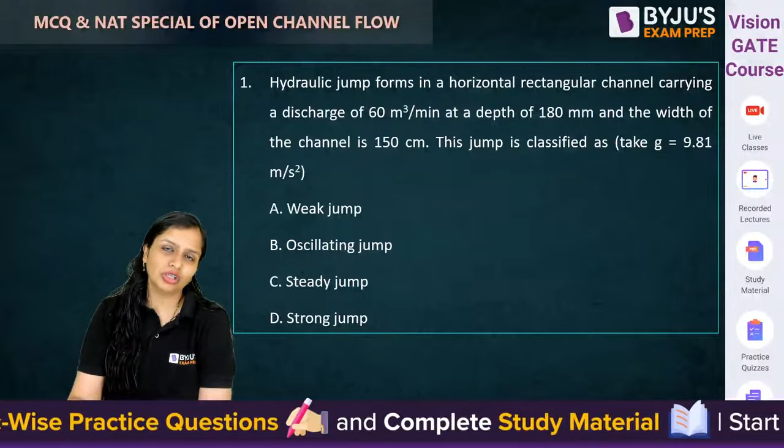Okay. So this is the first question, guys. Hydraulic jump forms in a horizontal rectangular channel carrying a discharge of 60 meter cube per minute at a depth of 180 mm and the width is 150 centimeter. You have to classify what type of jump is it. Come on, guys. I guess you already know, based on classification of Froude number, what is the type of jump. You need to remember it because it can be asked in match the following, it can be asked in numerical manner also.

So first you will calculate the Froude number. Since it is a rectangular channel, Froude number is V over root gy. Velocity I can write as discharge by area. Area is width into depth. Now, discharge is 60 meter cube per minute; convert minutes into seconds, 60 seconds. Width is 150 centimeter, that means 1.5 meter. Depth is 180 mm, that means 0.180 meter. Acceleration due to gravity is 9.81 and y is 0.180.

Solve it, how much is it coming? How much is it coming, guys? Solve it quickly. Calculate the Froude number. How much will it come? 2.787. Happy Engineers Day. Okay.

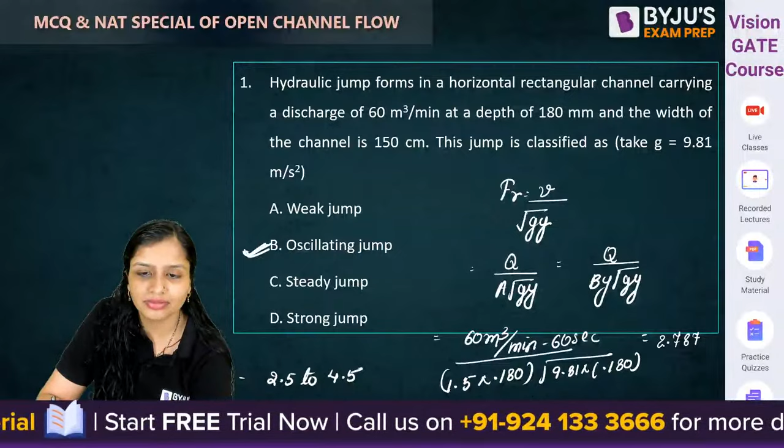So 2.787. You know, from 1 to 1.8 you call it an undular jump. From 1.8 to 2.5 you call it a weak jump. When the incoming Froude number is between 2.5 to 4.5, you call it an oscillating jump. So the type of jump is oscillating jump. Got that? Oscillating jump. Correct. Now, next question.

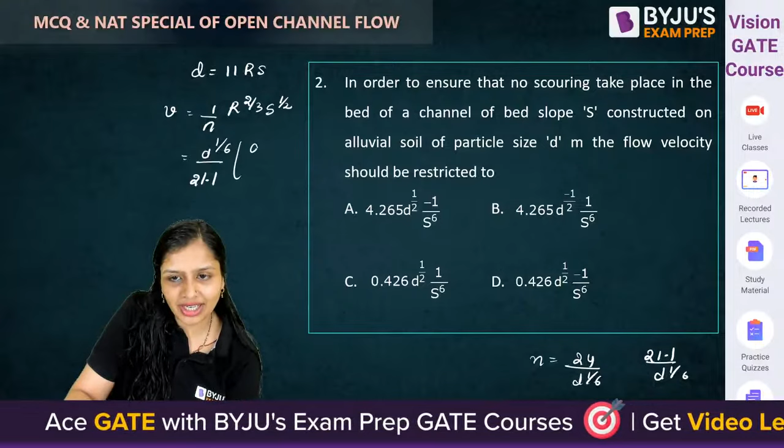For no scouring, d should be 11 RS. Velocity is 1 by n, R to the power 2 by 3, S to the power half. Generally, Strickler's equation gives 1 by n equal to 24 d to the power 1 by 6, but some books write it as 21.1 d to the power 1 by 6. Right now they have taken 21.1 d to the power 1 by 6. In place of R, you can write d by 11 S, to the power 2 by 3, and S to the power half. How much will it come?

How much will it come, guys? This will be in bottom only. Just a minute, 1 upon, or you can write it as 1 upon 21.1 d to the power 1 by 6. Anything is okay. How much will it come, guys? Tell me fast.

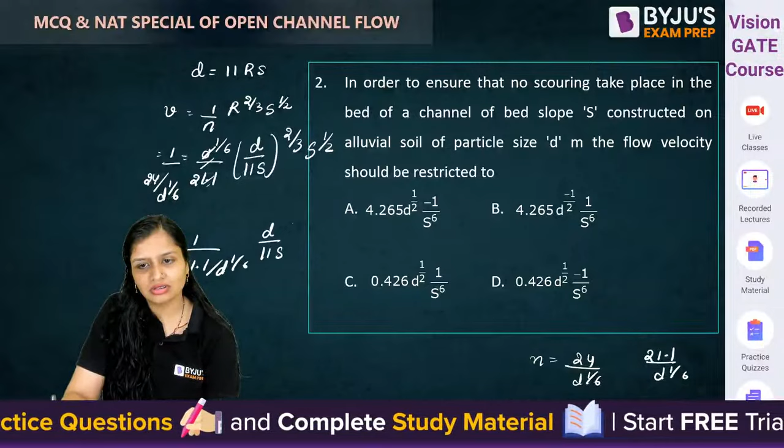S half minus 2 by 3 will come out to be how much? S minus 1 by 6.

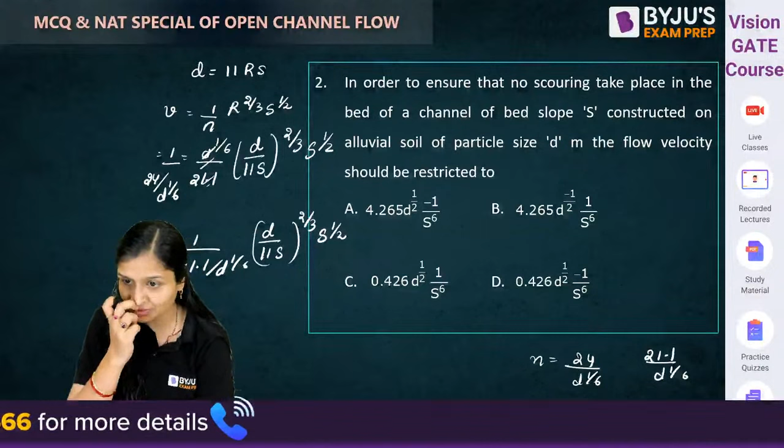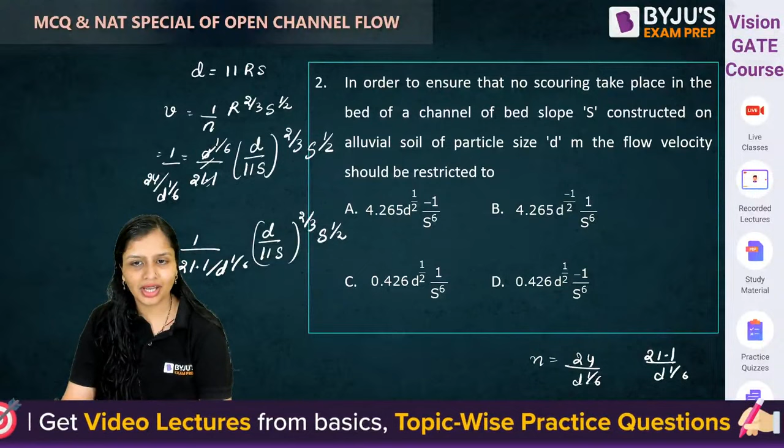Now you calculate, I have given you everything. I wrote everything. For no scouring, d is equal to 11 rs. The n value I have already given to you. It is from Strickler's equation 24 upon d to the power 1 by 6. You can also take this as 21.1 d to the power 1 by 6. Substitute it, you will get the answer.

Okay, this is a very easy question asked in many examinations. The Chezy's coefficient related to Darcy-Weisbach friction factor.

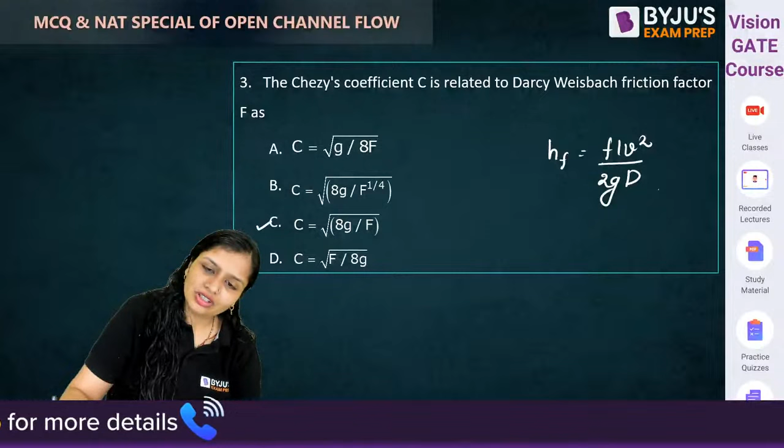Darcy-Weisbach friction factor is, you know this, FLV square upon 2GD. From here, if you calculate Chezy's constant coefficient, what does it come out to be? Correct, C is equal to root over 8G by F, where F is the friction factor.

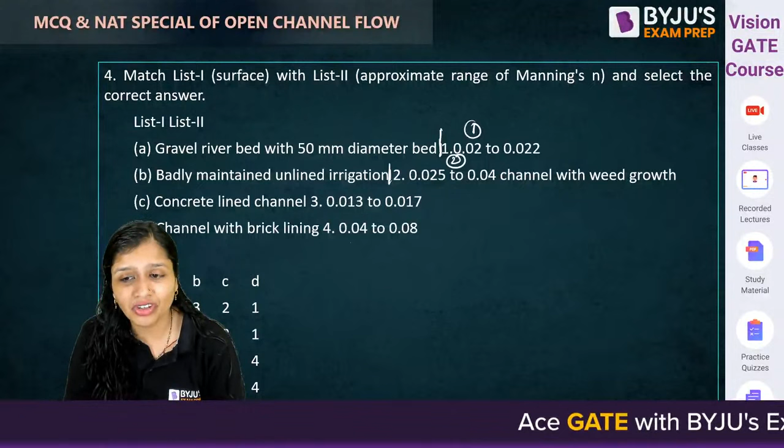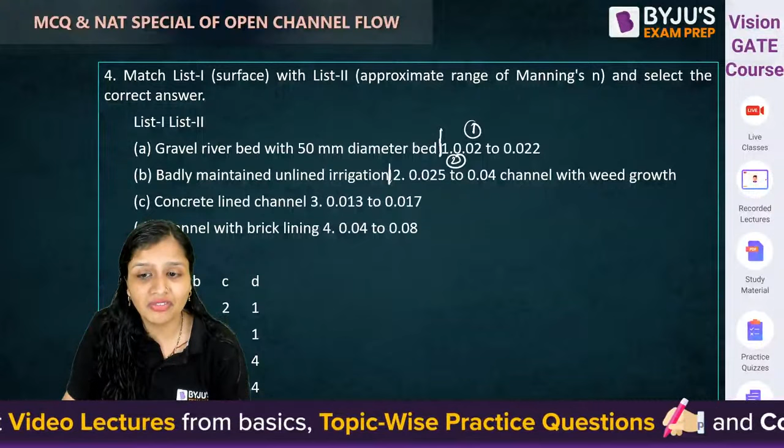If it is a badly maintained unlined irrigation canal, because you haven't provided any lining, no concrete lining, brick or masonry, nothing provided, so for that you will be having more Manning's coefficient. See, more roughness, more will be the Manning's roughness coefficient. You haven't maintained it, large friction will be there, roughness will be there. So definitely it will have the maximum amount of what? It will have roughness.

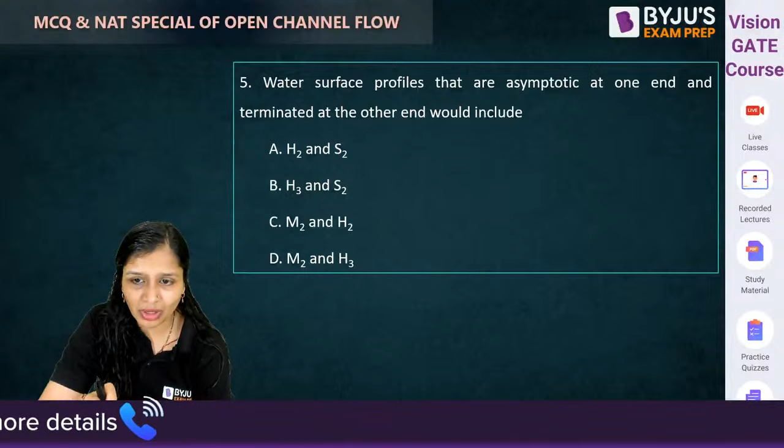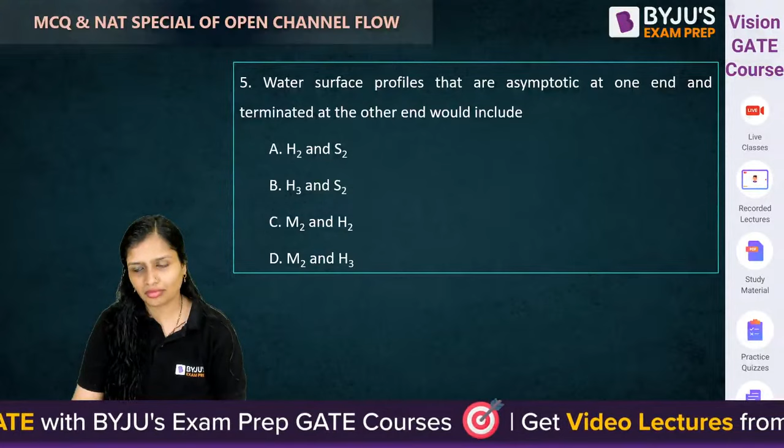Okay, now question number 5, now you will answer it properly. Water surface profiles that are asymptotic at one end and terminated at the other end. Asymptotic at one end and terminated at other end. Come on, guys.

Come on quickly, I want the answer for this question. At least you can give the answer for this question. If it is H2, what will happen? It will come, water will come from infinity.

Got it? Anybody got the answer? Nobody? That are asymptotic at one end.

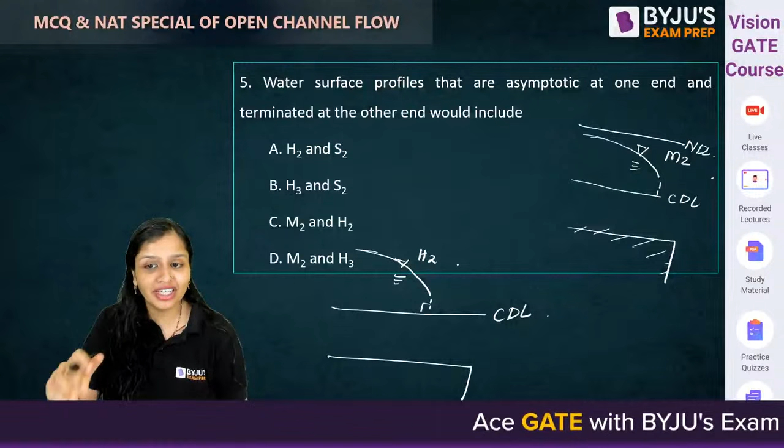Asymptotic at one end means that it will meet the NDL somewhere at infinity. Here you know that in horizontal slope you don't have H1, okay, and the NDL is somewhere at infinity first of all. So water will start from here and it will end at CDL. So what will happen? This flow profile is asymptotic at one end.

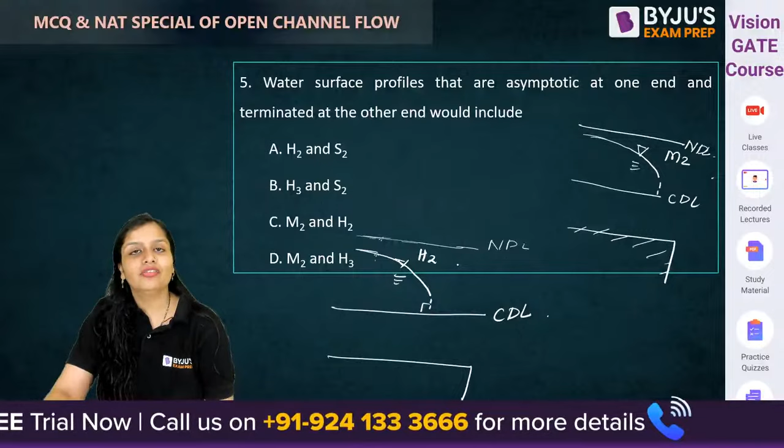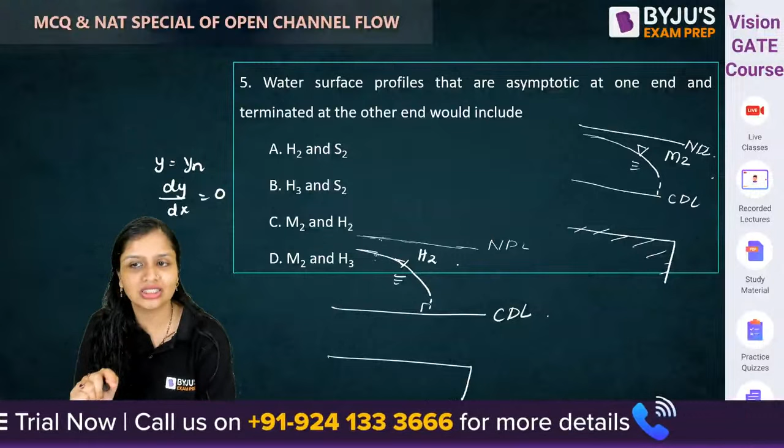Similarly, check it out. When y is equal to yn, dy by dx becomes 0, and when dy by dx becomes 0, it means that this water surface flow profile will meet NDL somewhere at infinity. So both H2 and M2 are asymptotic at one end. You can't say S2 is asymptotic because it is not, for that case, it is not going like this. It is not asymptotic at one end. Of course it will be a falling profile, but it is not asymptotic at one end. Got it? So that is the reason you won't call it S2.

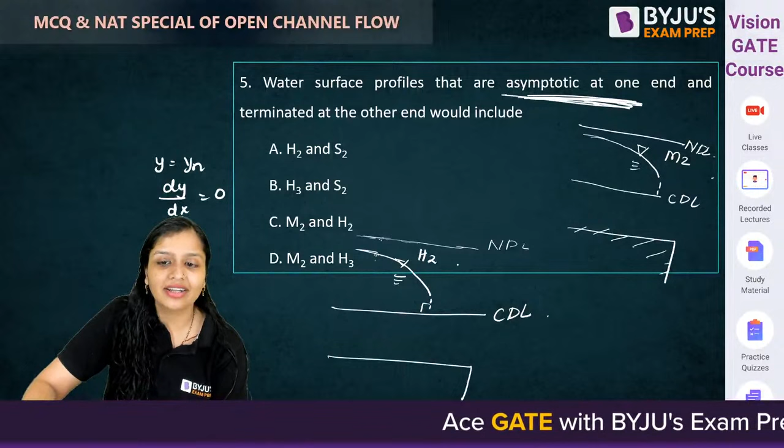Generally people write S2 as the answer, but no. Since it has given you this condition of asymptotic at one end, it will be H2 and M2. C will be the correct answer. Got it? This is a good question.

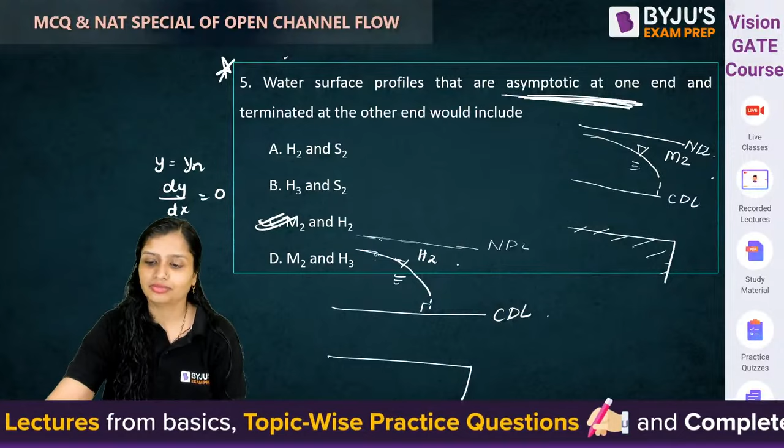Remember that. Now this question: a partially open sluice gate is suddenly raised to its full opening. It was first partially open, now it has been completely opened. So it is asking you what will be the surge waves which will be formed at the gate.

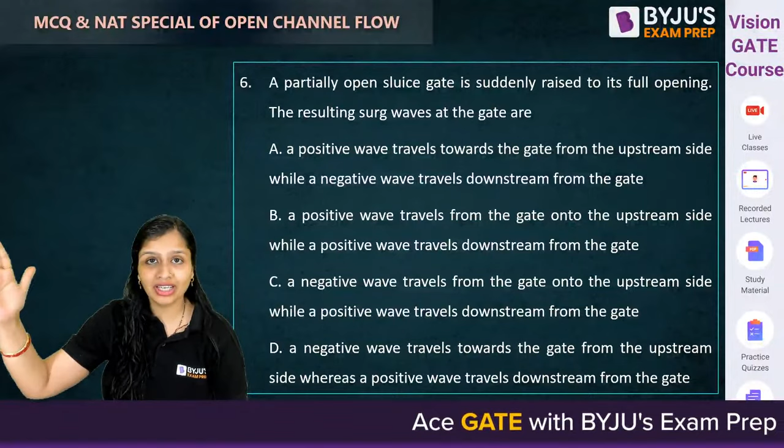You have opened the gate. Imagine on the downstream side, the level of water will increase. On the upstream side, the level of water will decrease. So what you will say, there will be a positive wave traveling down.

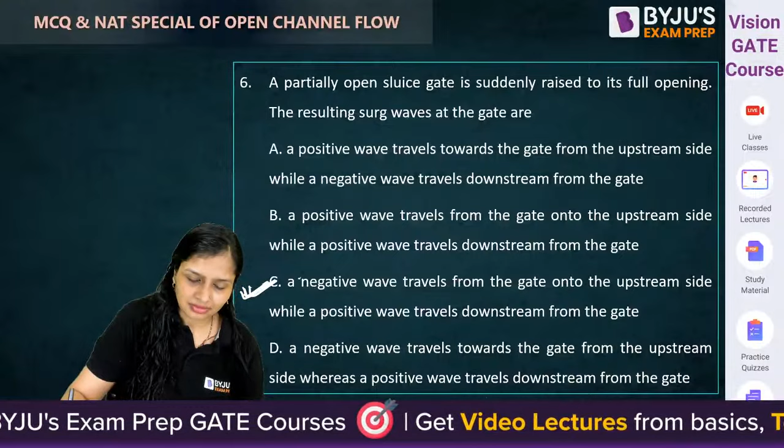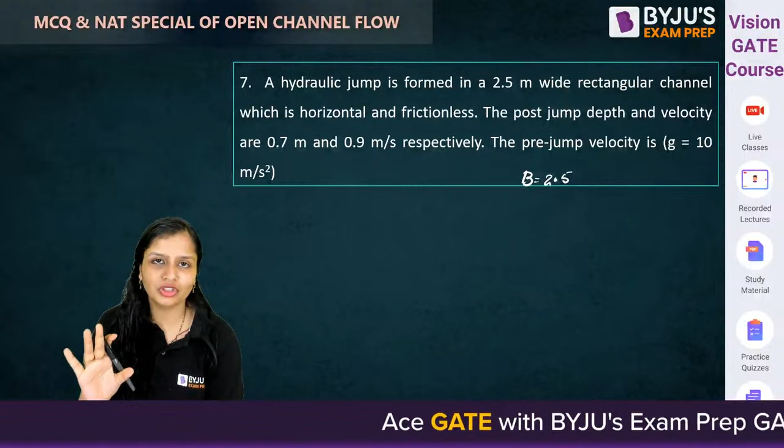Hydraulic jump in a 2.5 meter wide rectangular channel which is horizontal and frictionless. That means you can see the formula you apply: y2 by y1 equals half times minus 1 plus root over 1 plus 8 Fr1 squared. This is valid only for a horizontal, frictionless, rectangular channel. That's why the question has mentioned it is a rectangular channel which is horizontal and frictionless.

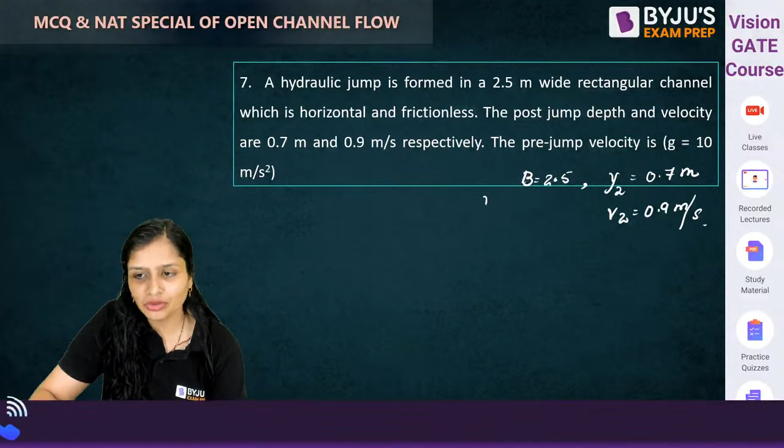Okay, post jump depth is given to you, that means subcritical depth is given as 0.7 meter and velocity is given as 0.9 meter per second. It is asking you the pre-jump velocity, that is V1. How will you calculate it, guys?

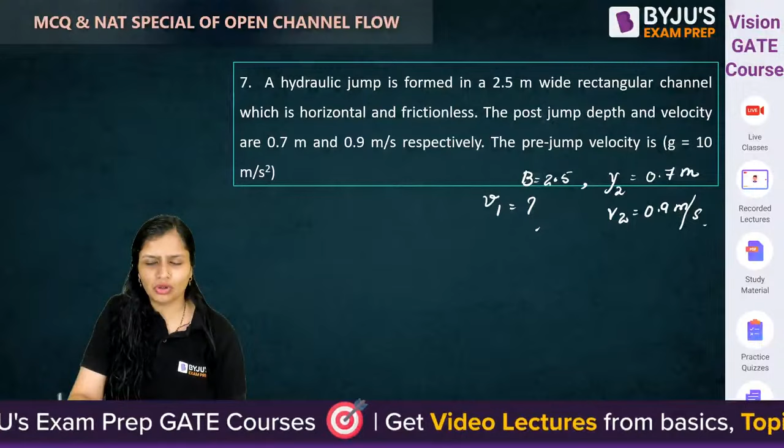Shall I first calculate the velocity, or should I first calculate the depth? Let us first calculate the depth.

Y2 is given to you as how much? 0.7.

Calculate Froude number 2. Take acceleration due to gravity as 10 because the question has mentioned 10. How much is it coming? Froude number, tell me how much it is coming. Somebody is calculating or not? 0.3406. Substitute it here.

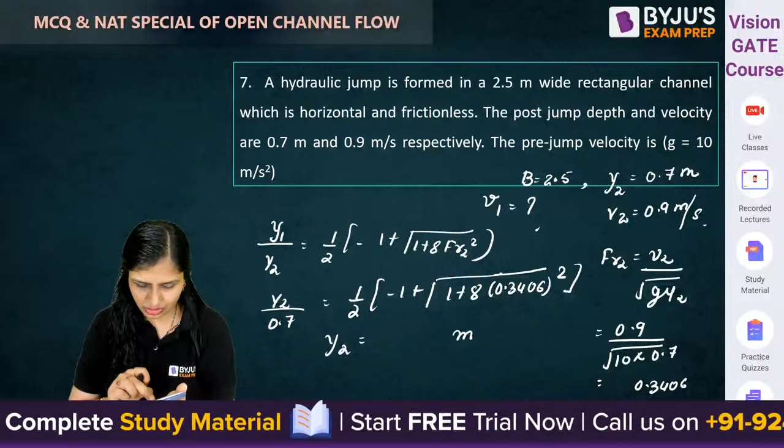From here, how much is y2 coming? Solve it. Solve how much is y2 coming? Minus 1 plus root over 1 plus 8 into 0.3406 squared into 0.7, divided by 2. How much is it coming? 0.13599.

0.1359. Okay, I haven't got the supercritical velocity, but I have got the supercritical depth. But you know, according to the continuity equation, V1 Y1 is equal to V2 Y2, because width is same anyway, it is not changing. So actually it is A1 V1 equal to A2 V2, but since the width is not changing, why include the width? That's why I have written V1 Y1 is equal to V2 Y2.

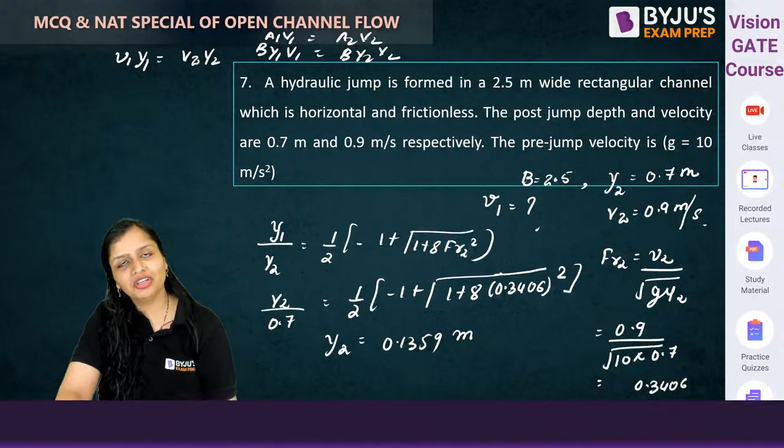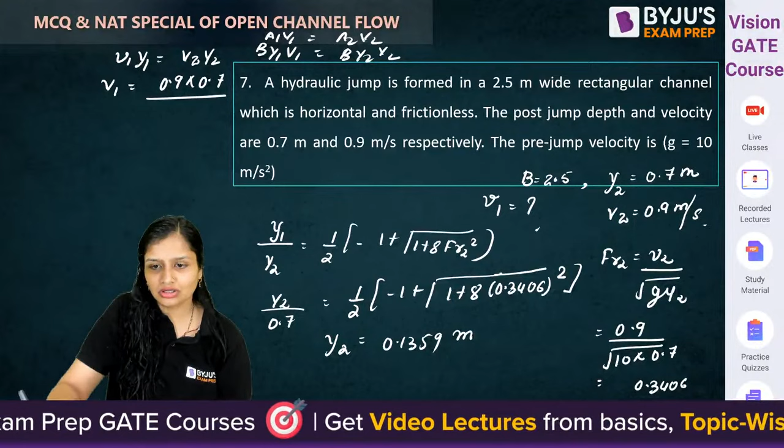Everything I know except V1. V2 is 0.9, Y2 is 0.7, and Y1 is 0.1359. How much do you get? 4.632. So this will be the velocity.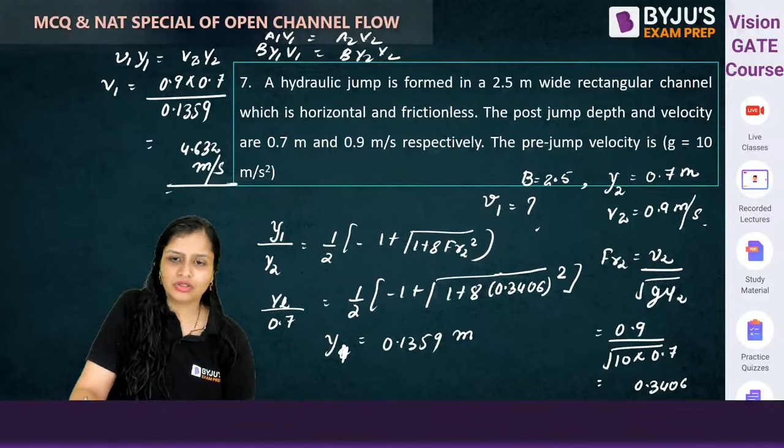So such simple questions can also be asked. Okay, now moving further, now we have questions. I have 7 questions from open channel, so I was thinking 9. Okay, so now we have questions from steel.

Steel, come on guys, read that. This I am not going to tell you, this you will be telling me. Read the following statements and identify the correct answer. Come on, guys.

The maximum effective slenderness ratio of a member normally acting as a tie in a roof truss or a bracing system, not considered effective when subjected to possible reversal of stress into compression resulting from the action of wind and earthquake force, is 300. Is it correct?

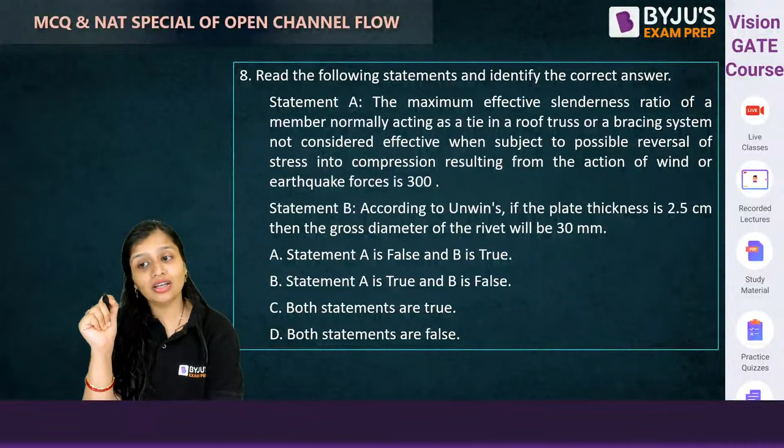And the second statement: according to Unwin's formula, if the plate thickness is 2.5 centimeter, then the gross dia of the rivet will be 30 mm.

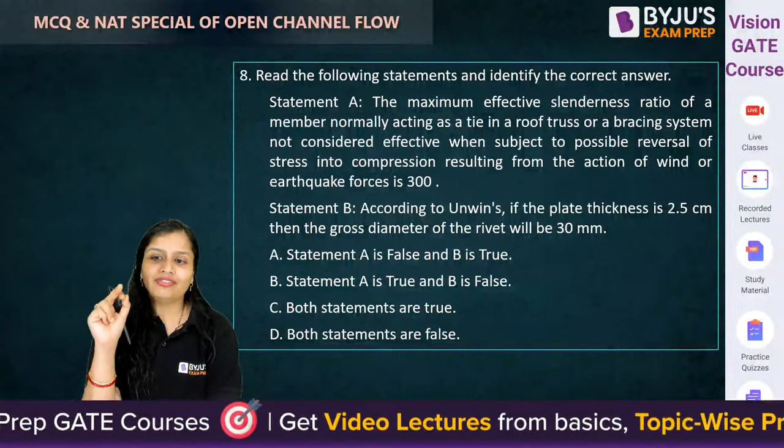No, it is not correct. When it is subjected to the action of wind and earthquake forces, slenderness ratio will become 350. In the question, it has given you 300, which is wrong. First statement is wrong.

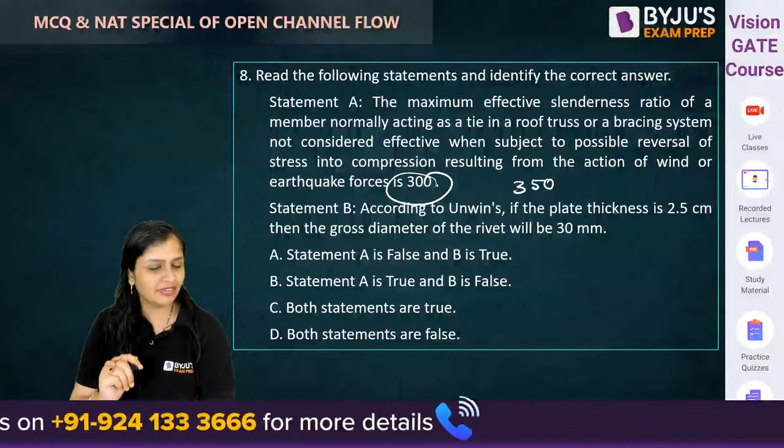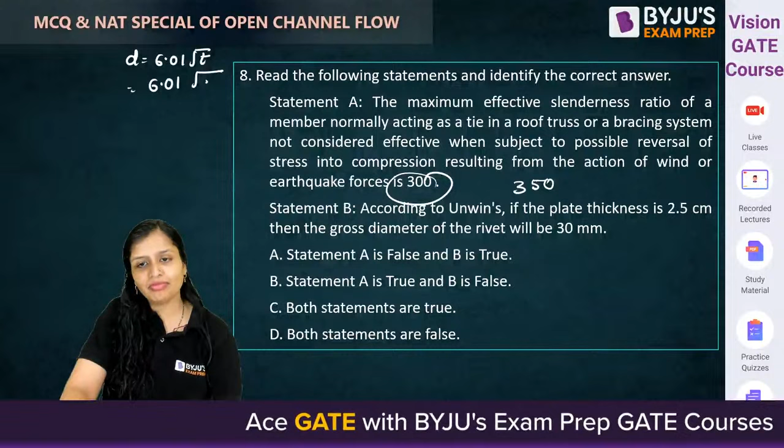Now talking according to Unwin's equation, plate thickness is given to you, so 6.01 root T. Come on, 6.01 root T, you have to substitute thickness in mm. So 2.5 centimeter means 25 mm. Root of 25 is 5. 6.01 into 5, how much will it come?

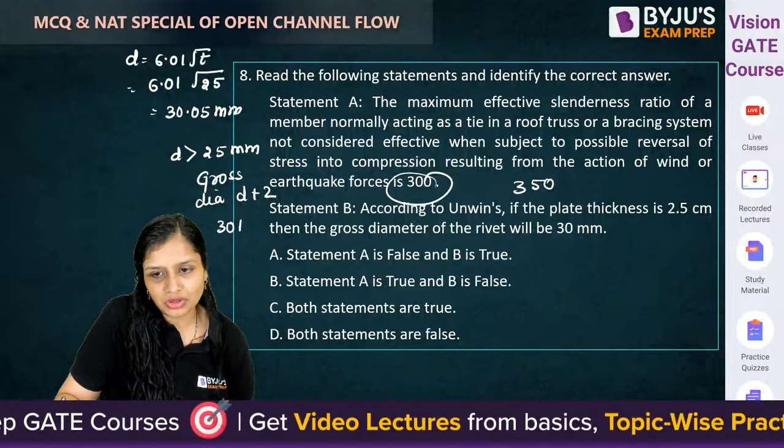30.05 mm. Now it is given that the gross diameter of the rivet will be 30 mm, that is very wrong. If the diameter comes out to be more than 25 mm, gross dia will become 30 plus 2. So gross dia is actually D plus 2, so 30 plus 2, that is 32 mm. But in the question it is giving me 30 mm, so both the statements are false.

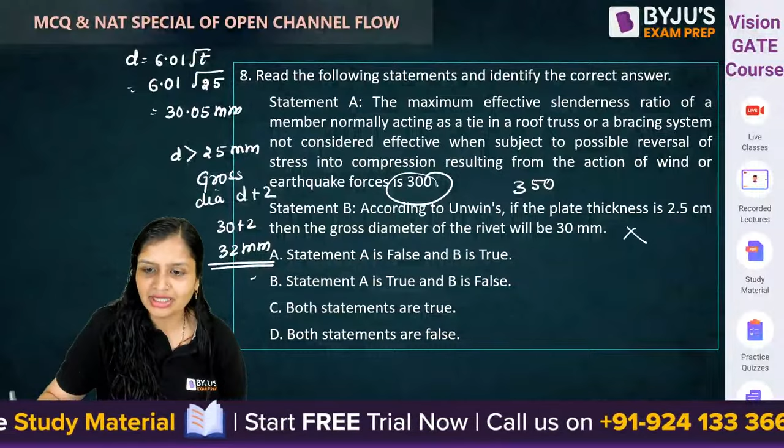Fine, now next question. If the thickness of the thicker plate is more than 21 mm and less than 32 mm, then the minimum size of weld shall be 8 mm. Is it correct? First tell me, is it correct or not?

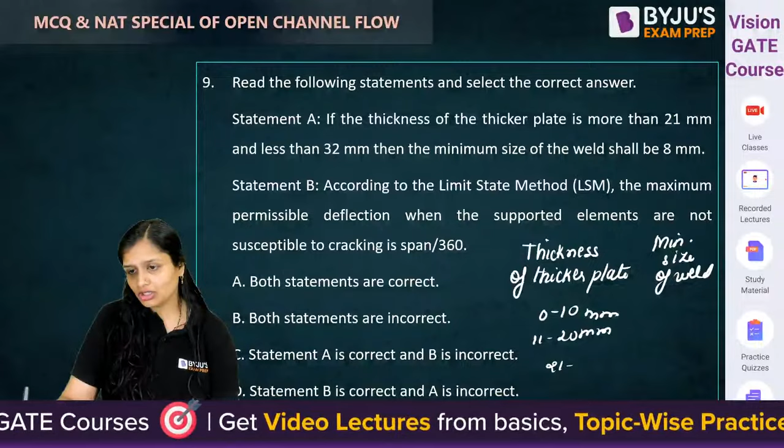There is a table: 0 to 10mm, 11 to 20mm, 21 to 32mm, greater than 32mm. Nobody is answering, you don't know? If the thickness of plate is more than 21mm and less than 32mm, actually...

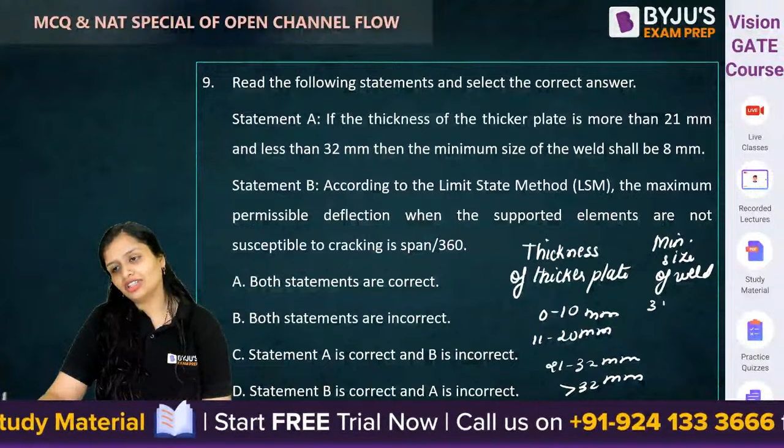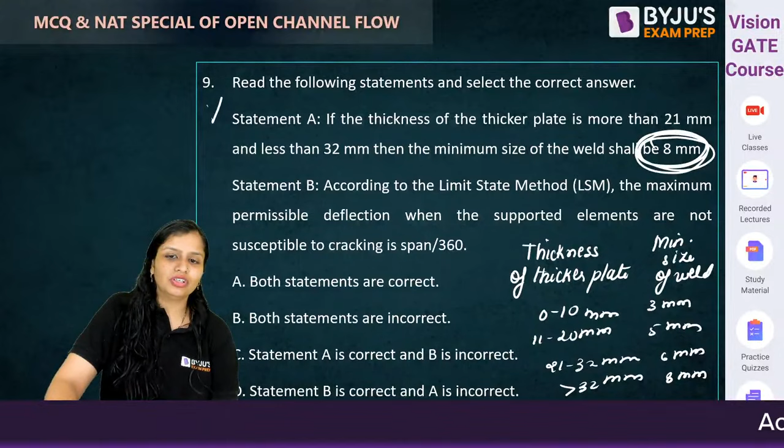This one is 3mm, 5mm, 6mm, 8mm. So actually it should be 6mm, but in the question it is telling 8mm, so the first statement is wrong. According to limit state method, the maximum permissible deflection when the supported elements are not susceptible to cracking is span by 360.

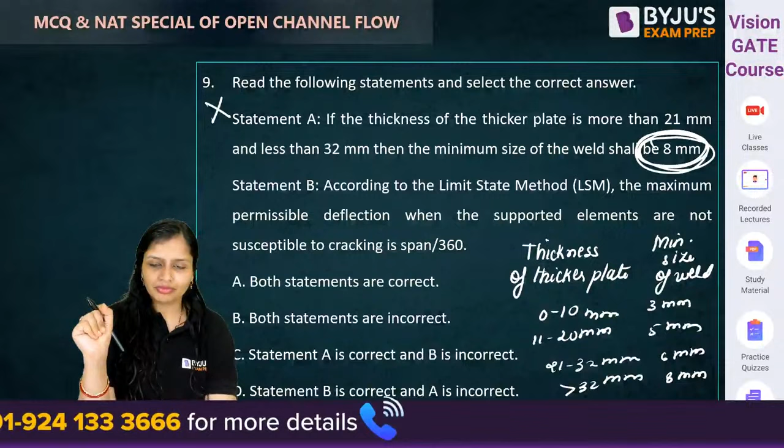Which is again wrong. Can you tell me what is the limit? Permissible deflection basically - can you tell me the permissible deflection when not susceptible to cracking? Very good, Salgar, so this will be span by 300.

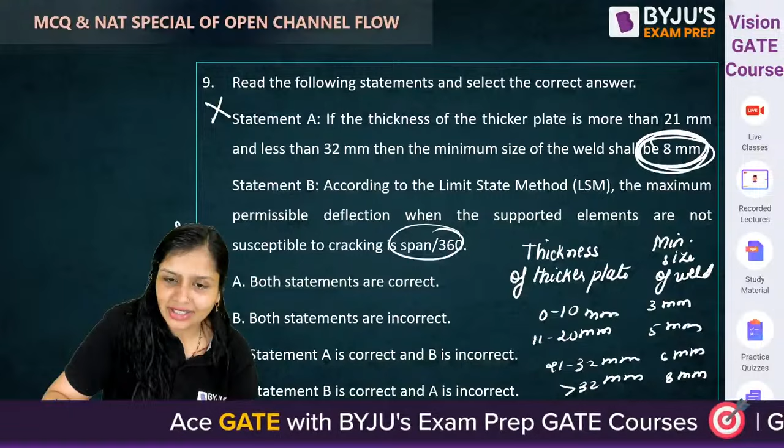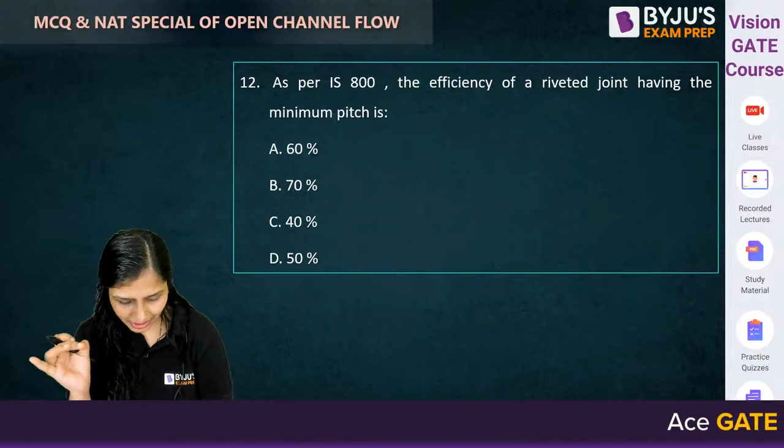Come on guys, tell me. As per IS 800, the efficiency of a riveted joint having minimum pitch. Okay, minimum pitch of rivet joint is how much? Tell me that.

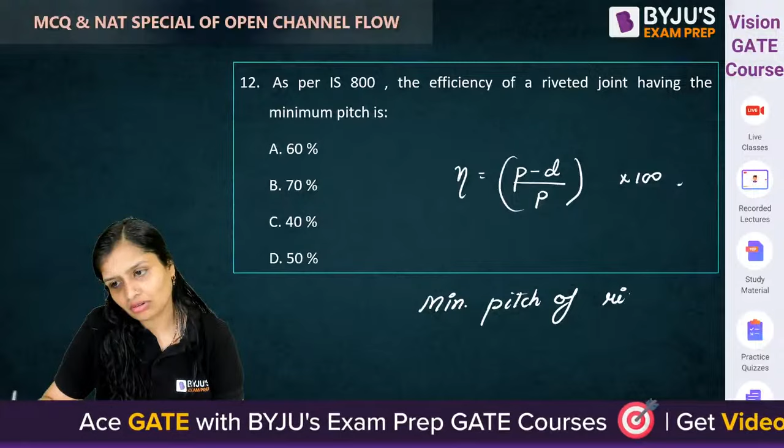So pitch will be 2.5D minus D, divided by 2.5D, into 100. So this will come out to be how much? 60.

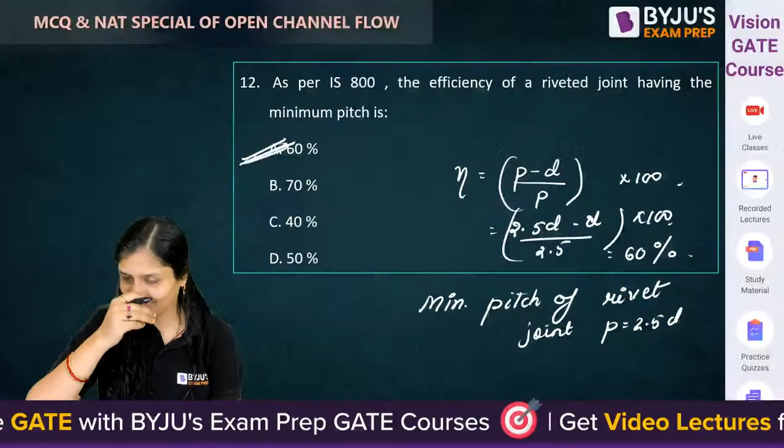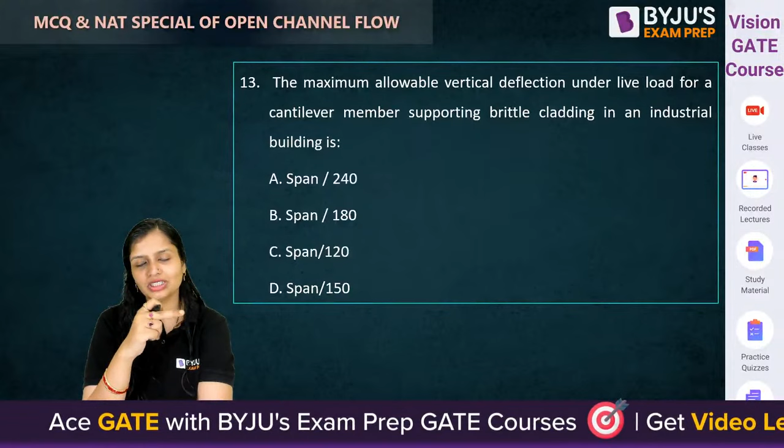Okay, how much will it come? Correct, it will come - hydrology is correct - span by 150. It will come how much? Span by 150, this is a codal provision.

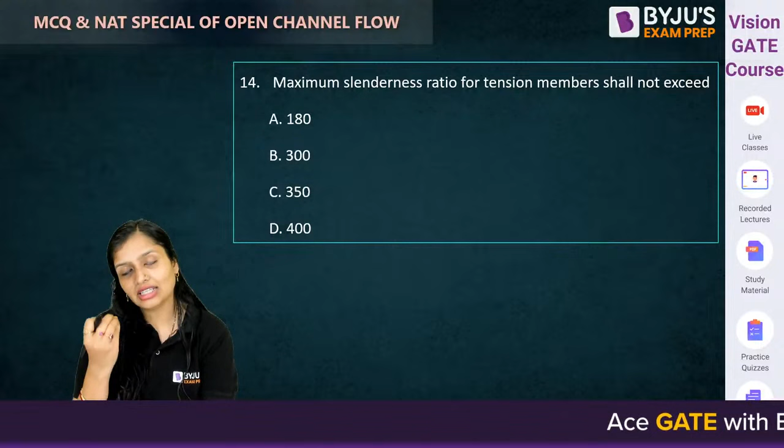Alright, maximum slenderness ratio for tension members. Asking for tension members - maximum slenderness ratio for tension members shall not exceed. Not exceed by how much?

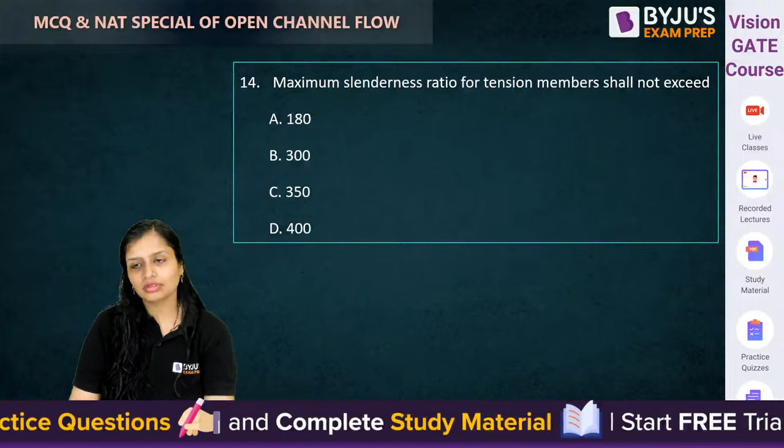Shall not exceed... quickly, shall not exceed... correct, it should not exceed 400, should not exceed 400.

Come on, I know you guys will make mistake. Oh my god, too good. Hydrology, Salgar, 25%.

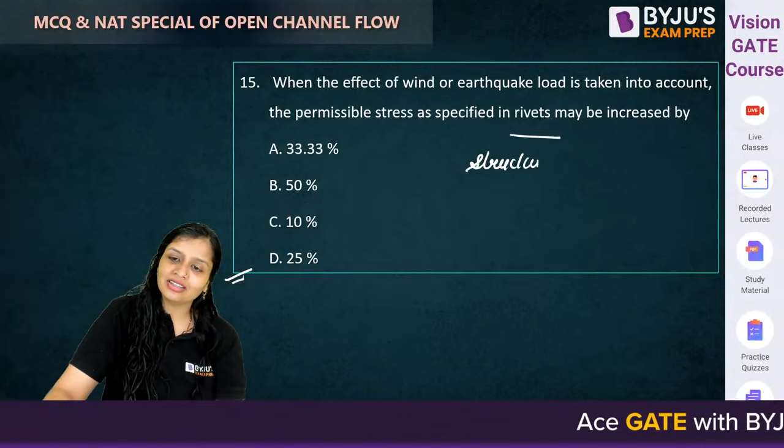If in this case, if it would have been given rather than rivets - if here it was given structural steel members instead - then what would have been the answer? If structural steel member was given instead of rivets, then what would have been the answer?

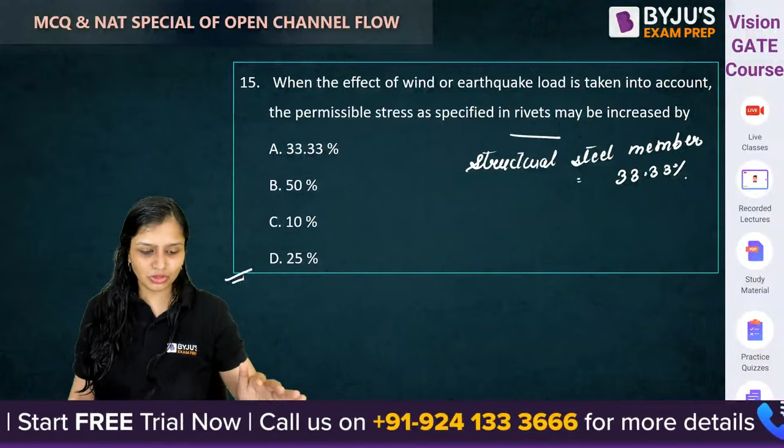33.33%. Actually, generally, maximum people just see wind and earthquake and they just write 33.33%, which is very wrong. Check it out कि वो क्वेश्चन में किसके बारे में पूछ रहा है आपसे. वो रिवेट्स के बारे में पूछ रहा है, स्ट्रक्चरल स्टील मेंबर्स के बारे में नहीं पूछ रहा है. Okay.

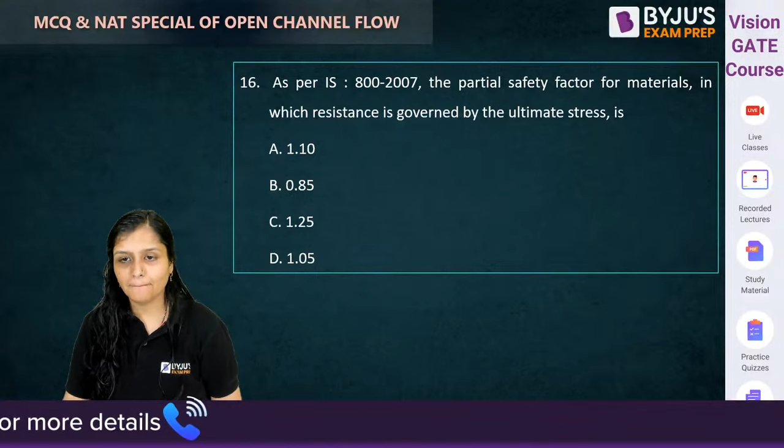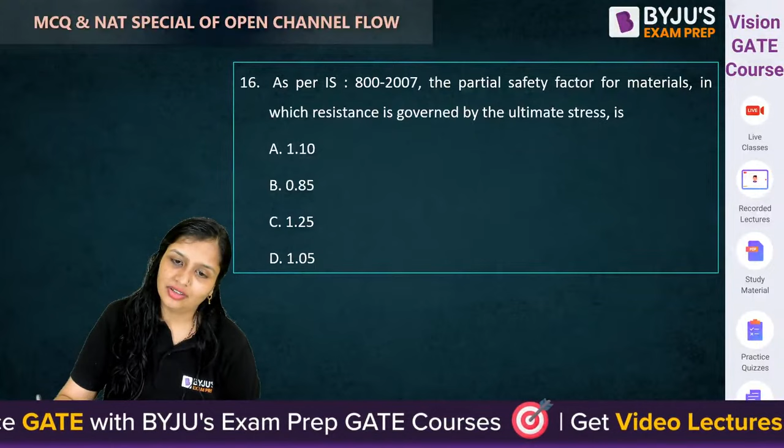Now, as per IS 800:2007, the partial safety factor for materials in which resistance is governed by the ultimate stress is? क्या होता है partial safety factor for materials? Come on guys, answer fast. Partial safety factor governed by the ultimate stress is 1.25. Partial safety factor होता है 1.25.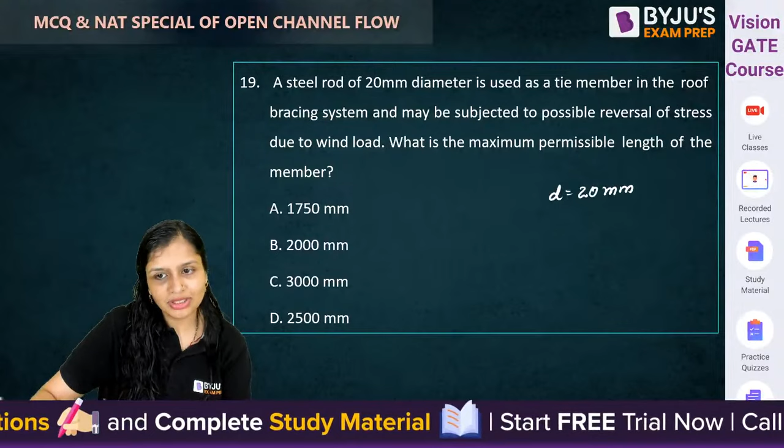अब इसका तो मैं नहीं बताऊंगी, ये बहुत सिंपल क्वेश्चन है, बट देन यू विल बी टेलिंग मी. A steel rod of diameter 20 mm is used as a tie member. It is subjected to possible reversal of stress due to wind load. You have to tell the L effective. Effective length you have to tell. Cool. इतनी जल्दी आ गया? कितना आ जाएगा? r होता है root over I by A.

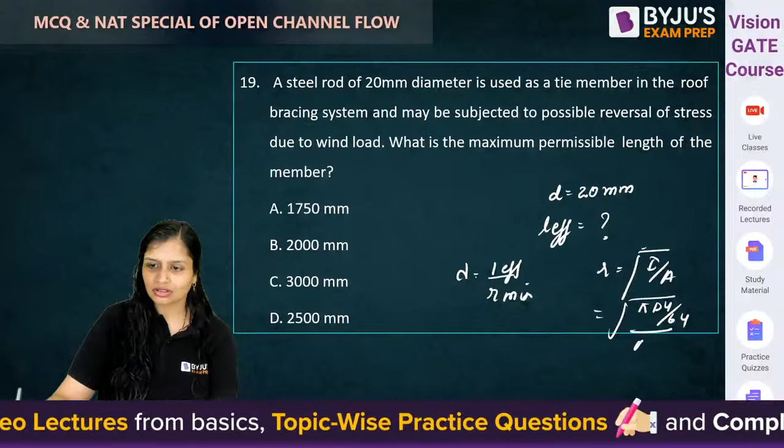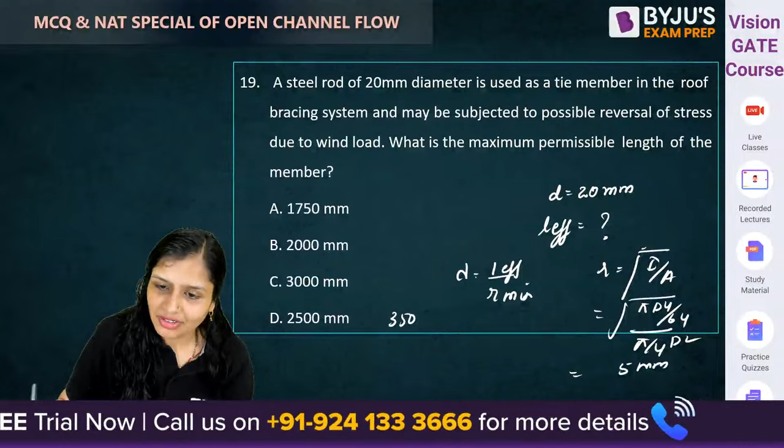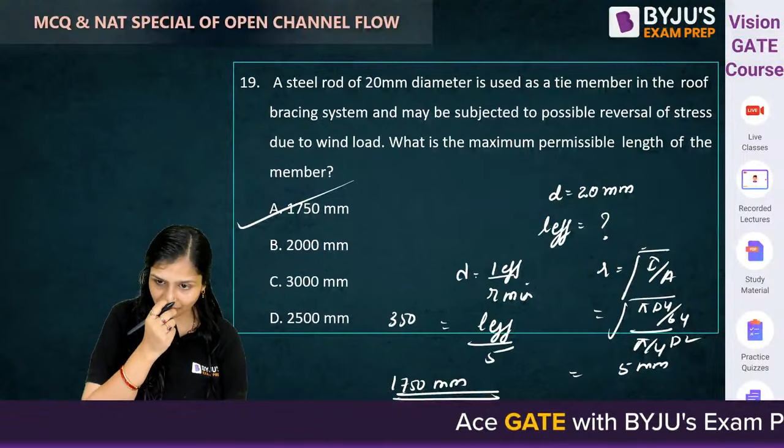अच्छा, what is the slenderness ratio you guys have taken? So r is 5 mm. Slenderness ratio 350. Correct. So this will be 350, this will be L effective, this will be 5. So this will come out to be 1750 mm. Cool. Will be the answer. How many questions correct out of 19 questions, guys?